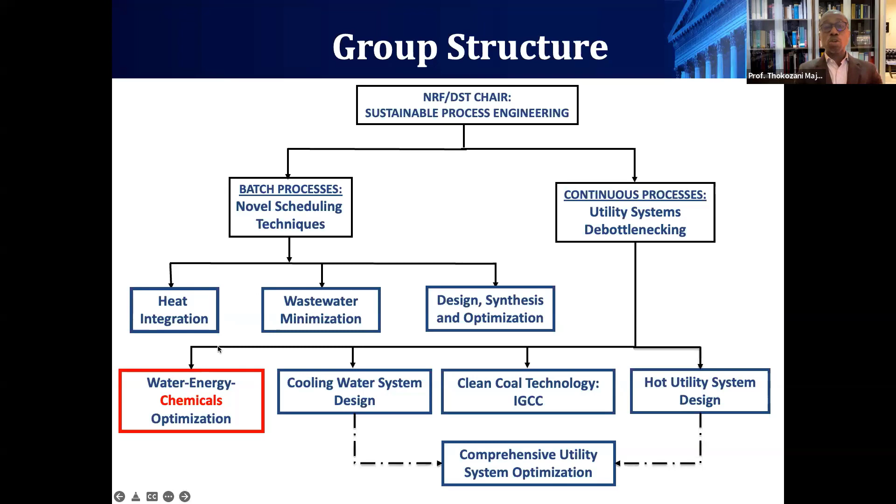As far as this presentation is concerned, I'm going to talk briefly about the social perspectives as far as water and energy are concerned, talk about water conservation methods, and then talk briefly about the nexus in its broadest sense. And then, as I did mention, there will be real-life case studies.

The social perspectives here, by the way, is something we always have to keep in mind. We cannot talk about saving water and energy without looking at the social dimension. In fact, that is the reason why we are looking at water and energy - it is the social perspective.

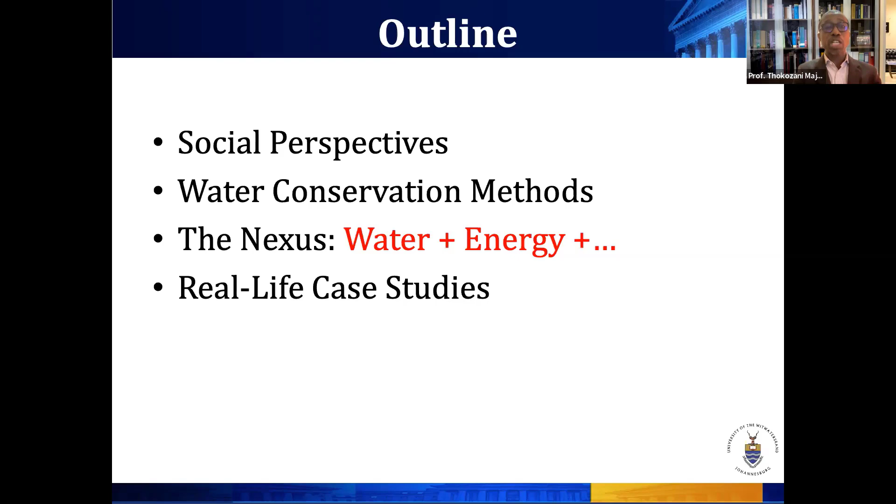Someone actually mentioned, this was in 2016 in the Los Angeles Times, that of the fears that have risen alongside a warming planet, perhaps there is nothing closer to our attention now than the possible water wars. The issue of water wars, although people look at it from a distance, we are starting to see it even within the South African context. People are starting to really realize how serious that issue is. But there are some documented cases of water wars, just to demonstrate why we are so obsessed with saving water.

If you think about India - this is closer to you, colleagues in India - you know very well the Cauvery River. There are two communities there, the Tamil Nadu and the Karnataka. These are agricultural communities, and they've always been fighting along this river. One is upstream and one is downstream - Karnataka is upstream and Tamil Nadu is downstream.

And they fight all the time as far as water is concerned. In our neighborhood here in the southern part of Africa, but not in South Africa per se, we've got an issue of Botswana and Namibia as well. The more Namibia develops, the less water gets into Botswana, because they use the same river stream from the Okavango River.

Then there's another case, which is also well documented, from Thailand. After the construction of the Pak Mun Dam, there were people that suffered downstream because of that - most of the water was captured by the dam. And then there's an issue of the Incomati River - this is now between us here in South Africa and Mozambique. There's always been an issue with the water in that Incomati River basin.

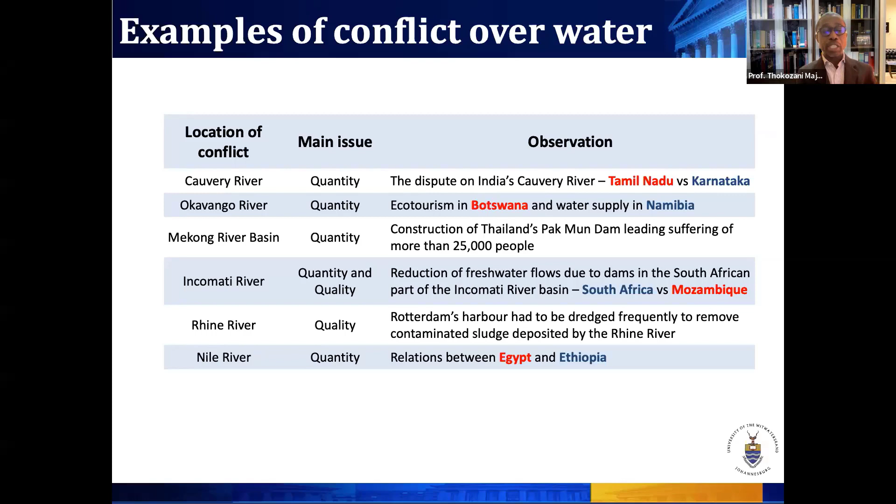South Africa ranks very high among the countries that are water scarce. Actually, we are regarded as a water scarce country. We rank in the top 30 list of countries considered driest in the world. As you know, there are about 195 countries in the world, so being in the top 30 means we really are very, very high. So that is where we are.

There are two reasons why a country could be water scarce: economic scarcity and physical scarcity. Economic scarcity is simply saying there is water there, but you have not invested enough to capture that water for adequate use. It's not that there's no water in that country. South Africa doesn't rank in that category.

South Africa is a physically scarce country, meaning that the location of the country is such that the rainfall is very, very low. We get less than 50% of the average rainfall globally as a country. So definitely we are a water scarce country, and we have to start thinking very seriously about how we use our water sparingly or efficiently.

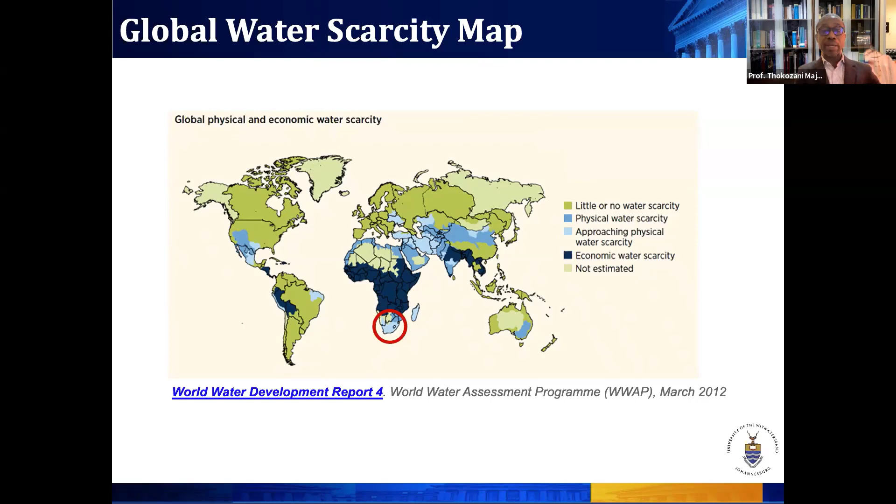I've got mining industry and power generation. If you group all of those together, they consume about 8% of water in South Africa. But what is hidden in that equation is that by the time that water leaves those industries, it is highly contaminated. So they use 8%, but they contaminate more than 60% of our water streams.

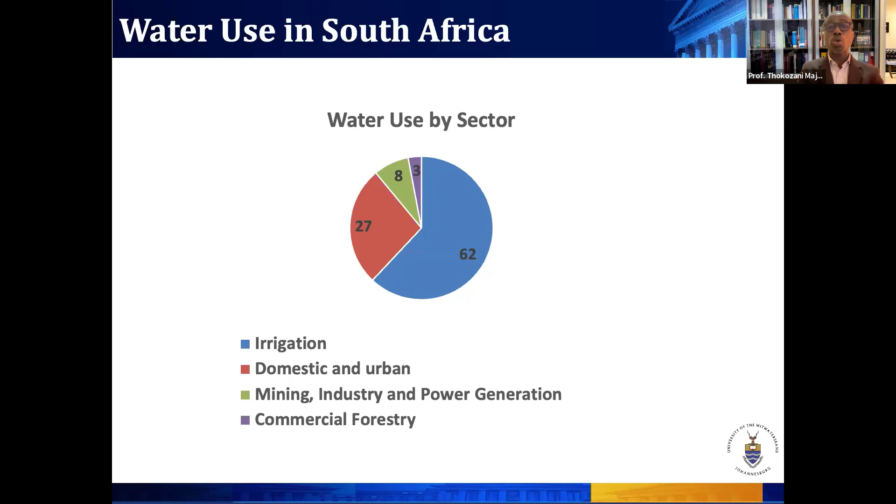I just have an example I want to share with you quickly. I think this video is going to play here, it's a real life case study. As I'm sitting here, I decided to work from home this morning because of load shedding, so that I have connectivity. But a stone's throw away from where I am, there's a river known as Henops River, which was very clean when I came here 15 years ago. It is now looking like what I'm going to show you, because of industries, and at the heart of those industries is the textile industry next to our airport. I'm going to show you that video now, I hope it plays quickly, it's not a very long video.

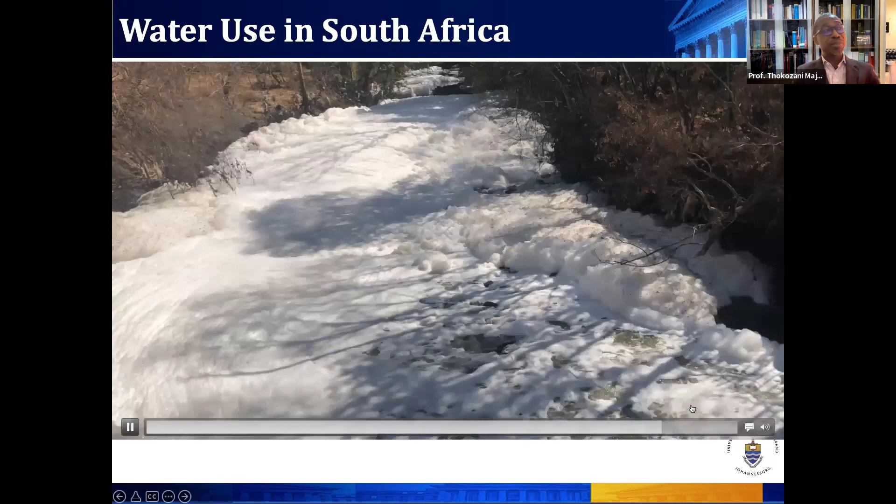I hope you can all see this. This is the river that was very, very clean not long ago. This is how it looks like now. That is foam that you see on top of this river. There is no life that can survive there. You can imagine what the COD, BOD there is at the moment. You can't find any fish there. There's stench all over that river. And that is all because of industries. It's one of our very biggest rivers, one of the biggest rivers in the Centurion area. So I felt I could just share that with you.

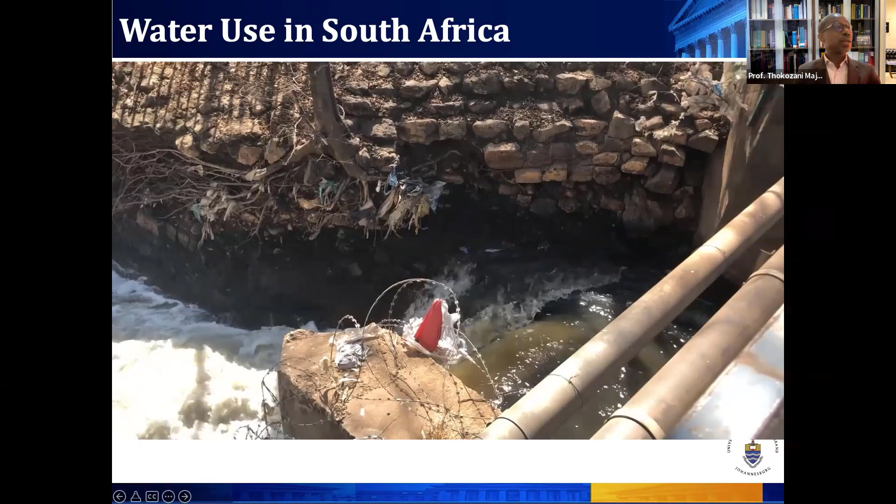Let me go to how do I get to the next slide now? I felt that I could just share that with you, just to show how bad things are at the moment.

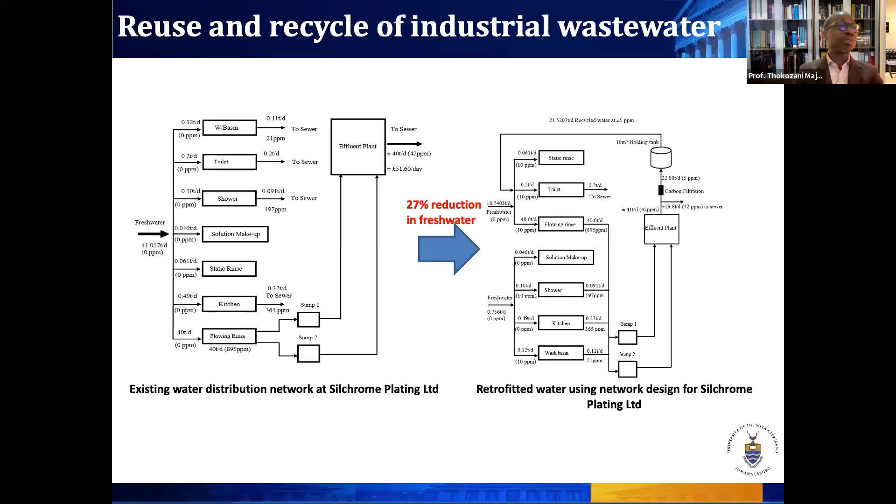But if you really want to see some serious or significant reduction in water use, it is when you start involving regeneration. So when you start talking about regeneration-recycle or regeneration-reuse, it is there that you see a steep change in terms of water reduction. But that also comes at a price. And why am I saying this?

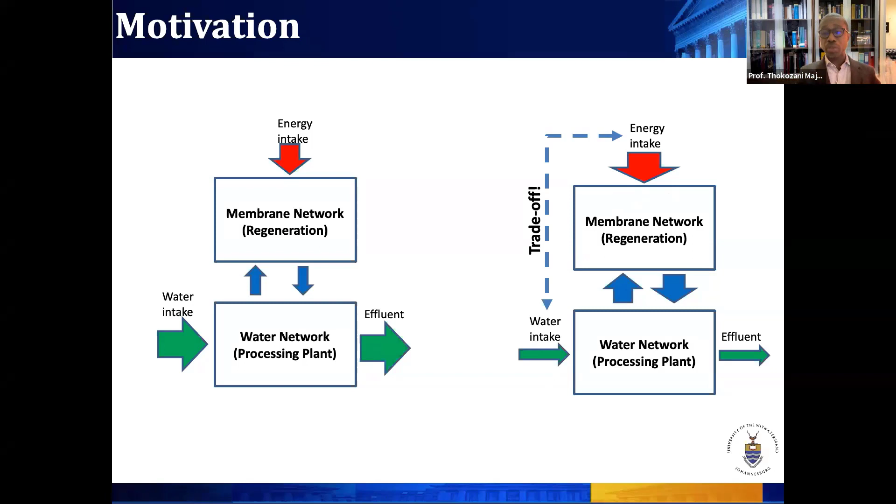But of course, we can expand this and look beyond the process. I've got an example here that I'm going to talk about where we go beyond the process as we look into the water energy nexus.

Now, the work that we do in our group is really about optimization, in the main - process optimization. So basically, in very simple terms, we are looking for that sweet spot, if you can call it that, where your overall cost is minimized because you've minimized your energy cost and you've minimized your water cost. We are looking for that point. That is basically the essence of the work we do in terms of optimization.

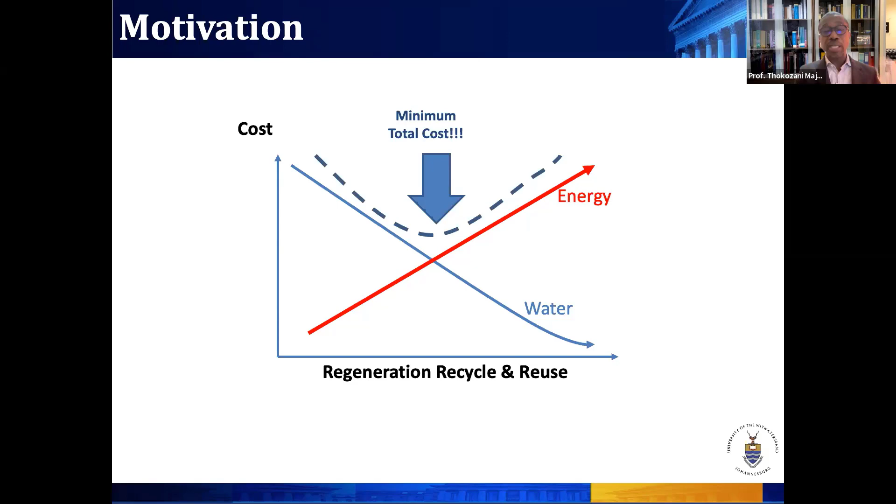You consider everything that is involved in the process, particularly within the energy water space. And this you cannot do, by the way, using rudimentary methods. You would need to have a systematic algorithm that allows you to reach that. It's not simulation, it is definitely optimization.

We've talked about, since yesterday, the water-energy-food nexus. But I've said in the recent past that maybe we are missing another dimension here, which is chemicals. Because you cannot achieve all of these things without chemicals. Chemicals play a very huge role in the food sector. I don't know how much food crops we can grow without chemicals.

To produce chemicals, we all know—I think it was Raj's presentation yesterday—the amount of energy that is used in the production of chemicals. Even Vanita spoke about that at some point. So the fact that chemicals are very central to our livelihoods means that we will always use energy and water in big numbers.

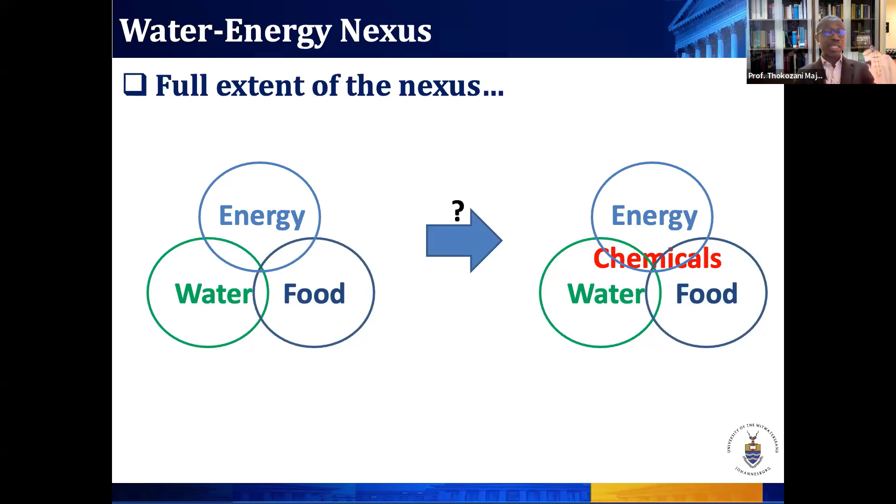That's why I'm saying maybe somewhere there—it's still very hypothetical at this stage. In fact, I haven't seen a paper that talks about this, where it's energy, water, food, or energy, water, chemicals together. I always leave out food because that's not really the space we find ourselves in most instances. But really the full nexus should involve everything that you see there. That's how it's supposed to be in real life.

That is the reason why, when we say we want to save energy, the first port of call should be industry. If we say we want to save water, still the first port of call should be industry, because they are the ones who contaminate the most. When we say we want to save energy, it should still be industry, because they are the ones who consume the most. So we are really at the right place as chemical engineers in terms of saving water and energy.

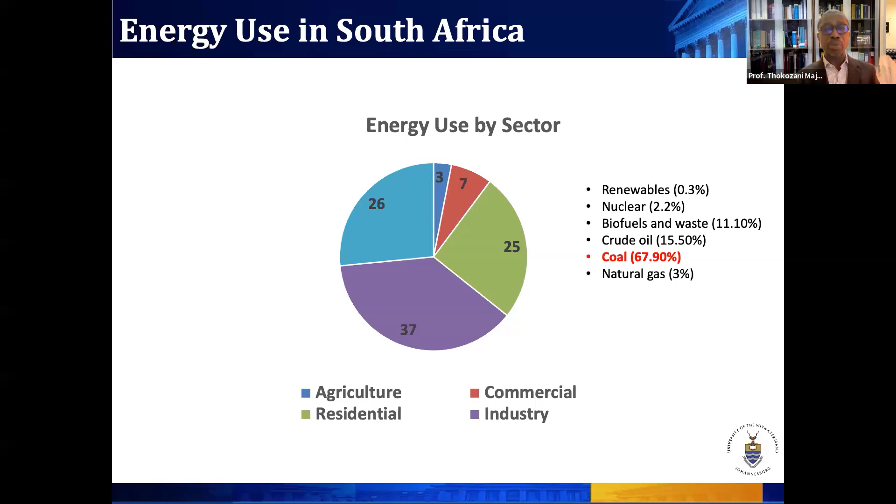But we have a lot of coal deposits in the country, which makes it very difficult for people to let go of coal. They also talk about clean coal technology, and to be frank with you, I don't think there is such a thing as clean coal technology as far as carbon dioxide is concerned. If you want to burn coal, you will produce carbon dioxide regardless of how clean it is.

So this brings me now to really the heart of my presentation, which is the case studies. If I can just share with you some of the case studies based on some of the work we've done here in South Africa. South Africa is a highly industrialized country—in fact, the most industrialized in Africa. So we've got a number of industries here, multinational companies from all sectors.

The example I have there is from the Pulp and Paper company, SAPPI—the South African Pulp and Paper Industry. It's a multinational, I think you would know SAPPI as well. It's one of the biggest pulp and paper manufacturers in the world, and it's a South African company. We were asked—they've got a facility not far from here. In fact, if you saw the floods on television not long ago, this is actually where this plant is.

It's just next to the ocean, a place known as Umkomas. It's called Sappi Saiccor at Umkomas. We did some work for them there. They wanted to reduce water in their bleaching facility.

When you make paper, you have to have bleaching at some point. That's why you have your white pages in particular. Your cardboard box is a bit dark because it's not bleached that much, but your paper that you write on is white because it's bleached using chlorides in particular. So it's a very, very important part of the plant, the bleaching plant, and it uses a lot of water.

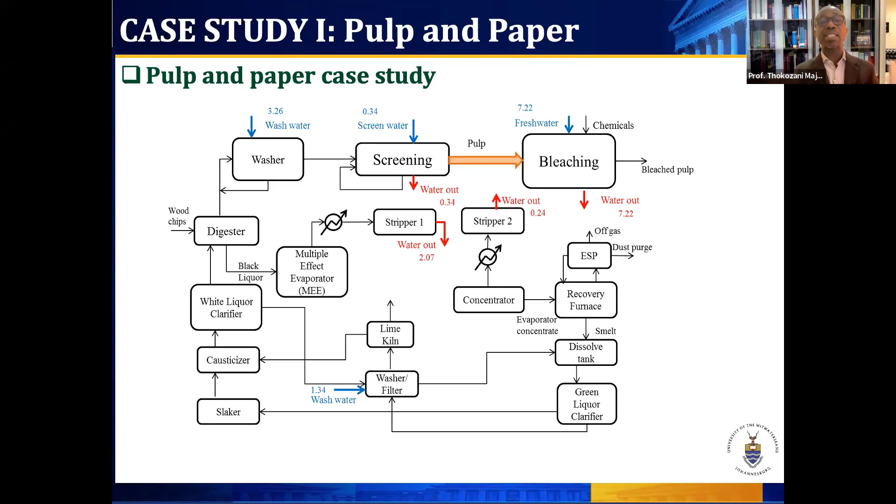It looks very simple when it gets to this stage, by the way. There's a lot you can do beyond this point. But to get here takes a very, very long time and a lot of buy-in from the engineers within the plant. Because all this information that I'm showing to you now, which is your flow rates and your composition, that is what you are given by the engineers who work in the plant, who understand how much and what composition it is.

How much goes where and what the composition is. So you have to work with the people in the plant, and then you'll discretize your plant into the sources as well as your sinks. When it gets to this point, then it is here that you use your mathematics. I tried very hard for this presentation not to show too many equations. In fact, I tried to avoid equations for this presentation, just to show you the concepts rather than the equations.

So we build a mathematical model from here that will definitely take advantage of the recyclability and reusability of water. And in those models, we can also embed regenerators. We've done that in the past. I can share with you some of the papers that we've written in that regard, where we've looked at ultrafiltration as one of the regenerators.

We've looked at reverse osmosis. We looked at electrodialysis, by the way, which is something that is not as common as reverse osmosis in South Africa, but it's a very powerful regenerator. We've also used membrane distillation, so we're doing some work there on membrane distillation as well. These are all the types of membranes that you would use as regeneration.

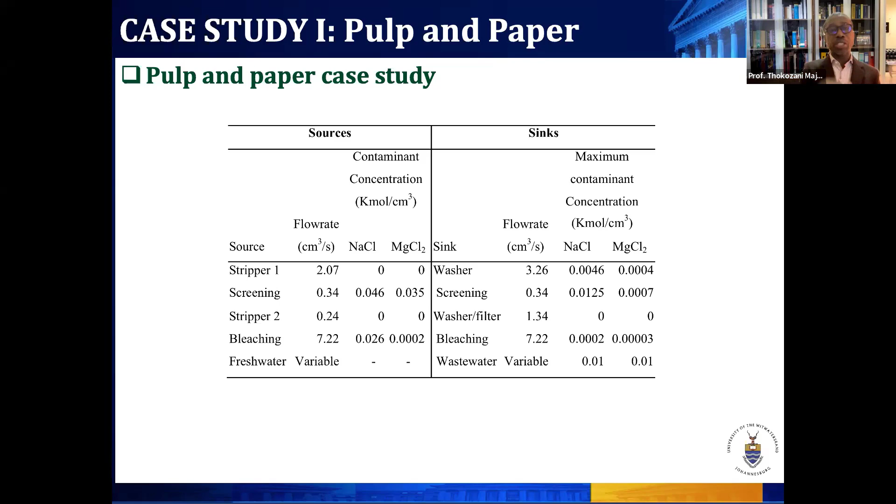So once you have this information, then really you put it into the model, and then you can come up with the plant. This is one of the results that we came up with.

And this is the good thing about using mathematical optimization. You can always play around with different variables and different options, and provide different avenues for companies to decide which one is cheaper, which one is doable at any given point in time.

What I'm giving you there was the best solution that would require the use of an electrodialysis regenerator. Now, this is very, very expensive - to put a regenerator in the plant is very expensive, not just in terms of energy, but in terms of the capital cost that you have to invest. So you always have to factor that in - there's an issue of operational cost because of energy, but there's also an issue of capital cost investment.

But the payback tends to be very, very short. Usually you have a payback period of less than 2 years in most of these projects, which is not a very bad payback. In most industries, they tend to be worried when you go beyond 3 years of payback period. So this is a doable project - about 36% reduction in fresh water, and about 60% reduction in wastewater because of a regenerator.

One thing that I don't mention here, and we don't mention in most of the work that we do, is that it is not just the wastewater we account for. We say 60% reduction in wastewater, but there's also brine that comes with the regeneration. We seldom ever talk about that. So it's not really effectively 60% reduction - I would say maybe effectively you are sitting at about 40% reduction in wastewater if you count the brine that would come from the electrodialysis unit.

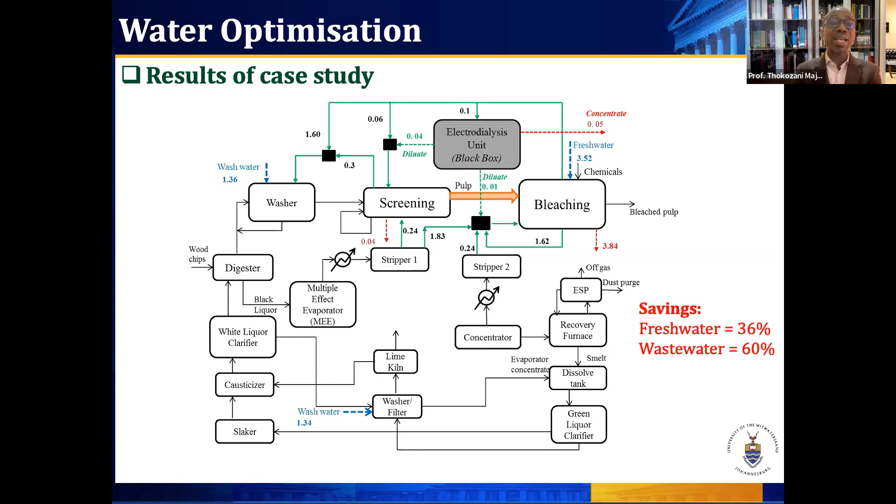So we've worked with the pulp and paper industries. They use a lot of water, and we are still continuing maybe to explore avenues of working further, because this was just one unit. And one of the things that came out of that project was that you could actually have a zero effluent facility - one facility that can have zero effluent, because some of that water had a sink in the operation. They could actually afford to do that.

There's another example here. We have Johnson & Johnson, which is not far from where I am - it's in East London. East London is one of the cities in one of the provinces, Eastern Cape here in South Africa. It's also a highly industrialized province - the biggest Mercedes assembly facility is down in East London, Mercedes-Benz. But they also have Johnson & Johnson there.

Johnson & Johnson, as you know, is a pharmaceutical facility. They make shampoos in that facility, they make deodorants, they make soaps, they make lotions. We worked in that facility about, what now, maybe 6-7 years ago. The idea again was to reduce water.

I've just given you the layout of how the facility looks like. They receive water from the municipal supply, and most of it will be used for cleaning - they'll clean the mixers and the holding tanks. They'll also use it somewhere in heating and cooling. Some of it is deionized because, of course, you're dealing with a pharmaceutical facility, so your water must be of the cleanest possible standards. They'll deionize that water, but there's also water they would use for general domestic purposes like drinking and ablution facilities.

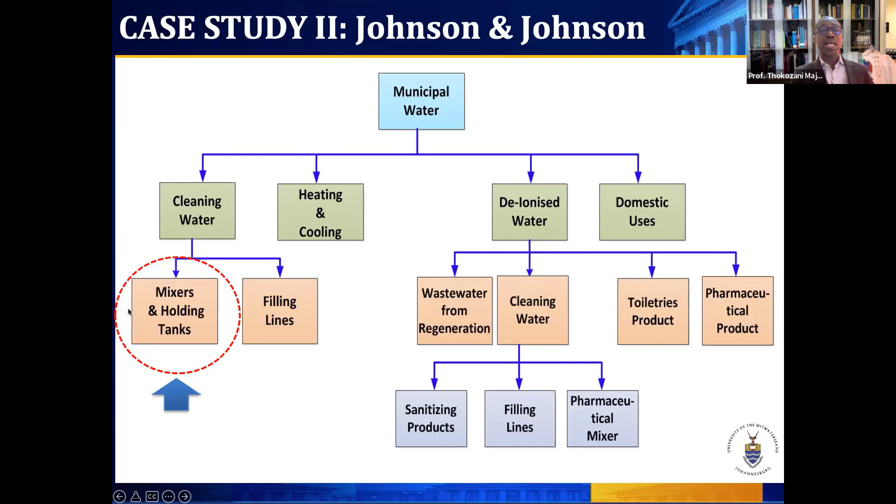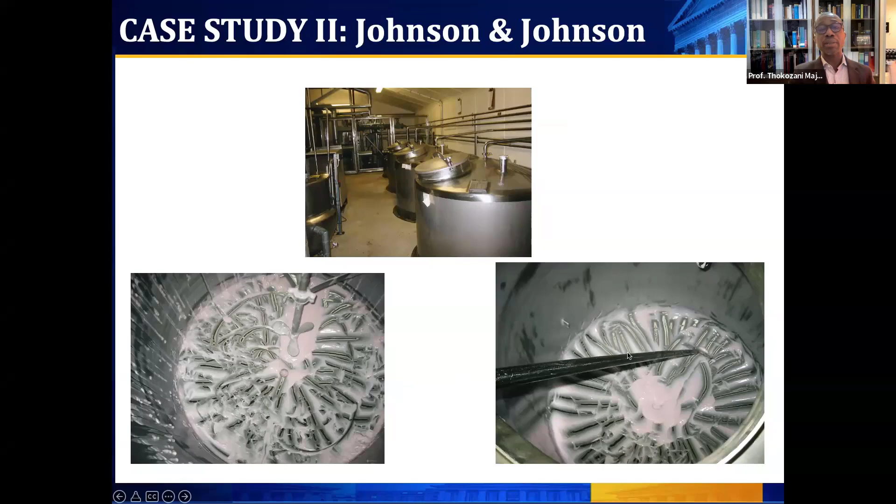Now what they do is they spray these tanks with water, clean water from the municipality, and that all goes into the drain. This is still a product that goes into the drains. When we visited that facility, on my first day, I realized there was a good opportunity for saving water. They just spray this and all of it goes into the drain. So we had to see what were the avenues for reducing that water.

Some of the results. Again, before you even go there, you need to get a lot of information from the people who work in the plant. You also, as a scientist, have to spend time in the plant. I have a nice photo that I took there, but I don't have it with me here. I spent a lot of time in that plant as well.

So they make shampoos, deodorants and lotions, and we know from the plant that after they've produced the shampoos, there's a residue left in the tank. This is the degree of contamination you have. It's important to know this to determine recyclability, because you don't want to tamper with product integrity. If we reuse water that is contaminated, it must not contaminate the next product in the batch. This is a batch facility, and that's another dimension that makes it very complicated.

Each of those tanks will produce different materials at different times, deodorants at some point, creams at another. So you have to make sure the cleaning is really done properly so there's no opportunity for cross-contamination, which would affect product integrity. Quality there is of essence.

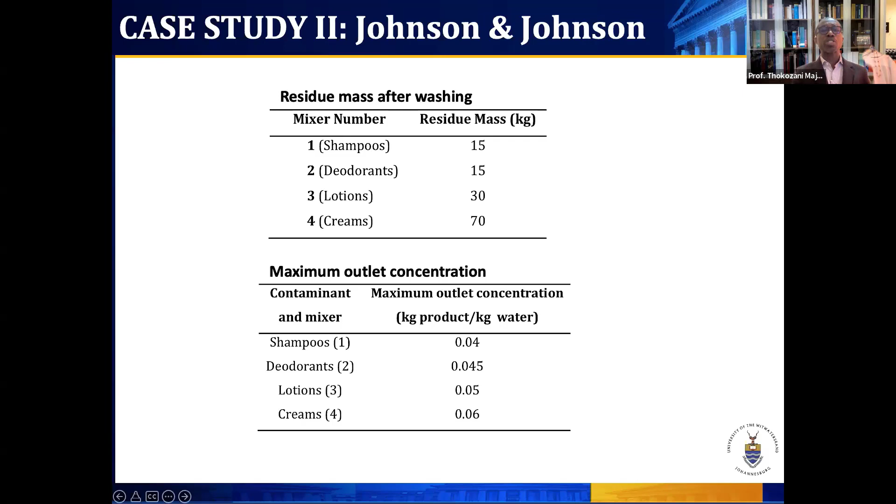So all this information would come from the plant. They'll also tell you the maximum outlet concentration of water they produce. After they've sprayed, that water has to be dispensed into the nearby river stream, so there's a limit on how much concentration is allowed. All this information is given to us.

And then, of course, the amount of water they use when they clean. CIP is a very common term used in almost all batch facilities—it stands for cleaning in place. Even in the textile industries, they've got CIPs. So they would clean, and this is the amount of water used in cleaning each batch, to remove whatever residual product is there.

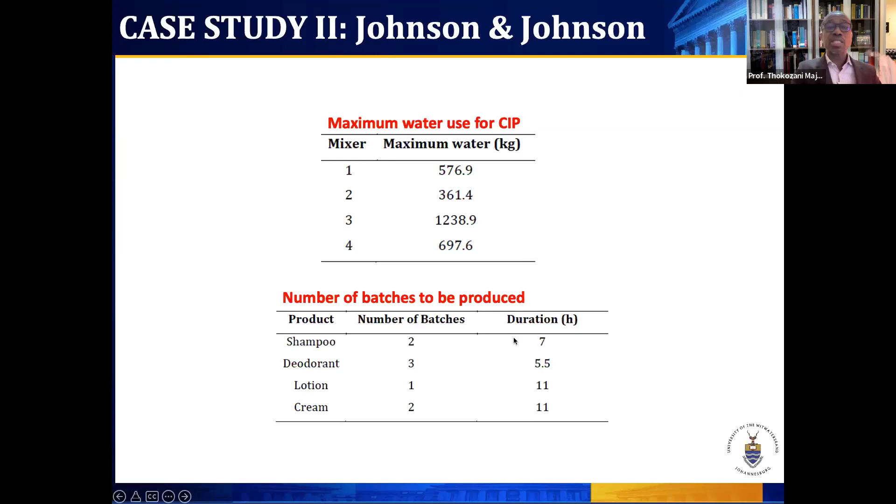They would also give us the number of batches they'd have to produce in a given period, and how long it takes within the tank to produce this. This is the issue—when dealing with batch plants, you cannot avoid looking at time. So this is the time dimension they gave us as well.

But with the background I've just given you, you leave some product in the tank, and you spray the tank to clean it for the next batch. That water you spray leaves with the product. We realized that by recycling that water back into the facility, some of the product could actually be recovered, because most of these lotions are aqueous based. So in any event, in that tank you'll be putting water. If you recover some of the streams back into the tank and top it up with water before doing the ultimate formulation, you recover quite a number of products very easily.

So there was a 30% product recovery, associated with almost 3 million rand per annum saved in that project. They still do that, by the way—I'm still in communication with them. This is equivalent to about $200,000. And as I say, this was some time ago, maybe more than 6 years ago when we did this.

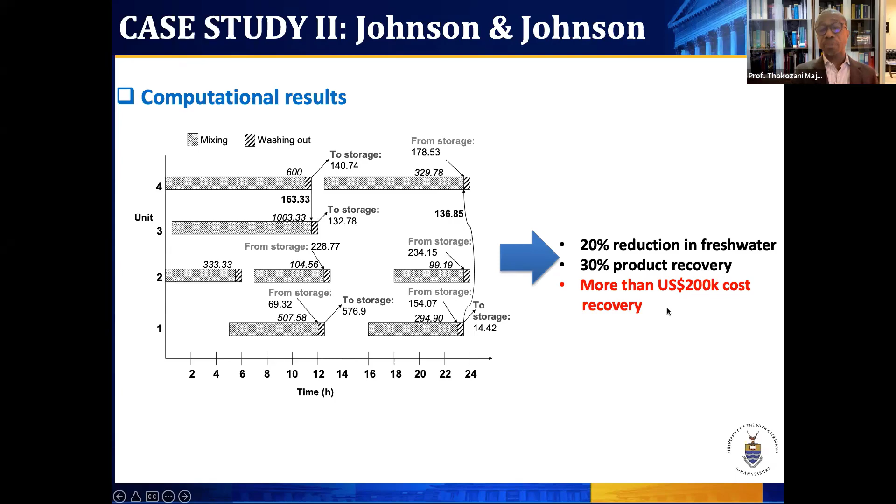It would be now of greater value than that 3.7 odd million rands per annum that they were saving. So that's another example. And then lastly, I just want to share with you quickly one example.

This is another example based on ESKOM, our largest power generation facility. They've got about 15 huge power generation facilities in the country, old style facilities based on pulverized coal power generation. It's just a boiler: you put in coal, boil the water, steam it up, superheat the steam, run your turbine, and ultimately you have your electricity. There are 15 of them in the country.

We were asked to look at one in particular, which is in Kriel. Kriel is in Mpumalanga, another province here in South Africa. This is a 3.6 gigawatt facility. South Africa as a country is a 43 gigawatt facility, so this gives you a sense of how big this facility is - that's almost 10% of the national capacity required. So it is a huge facility.

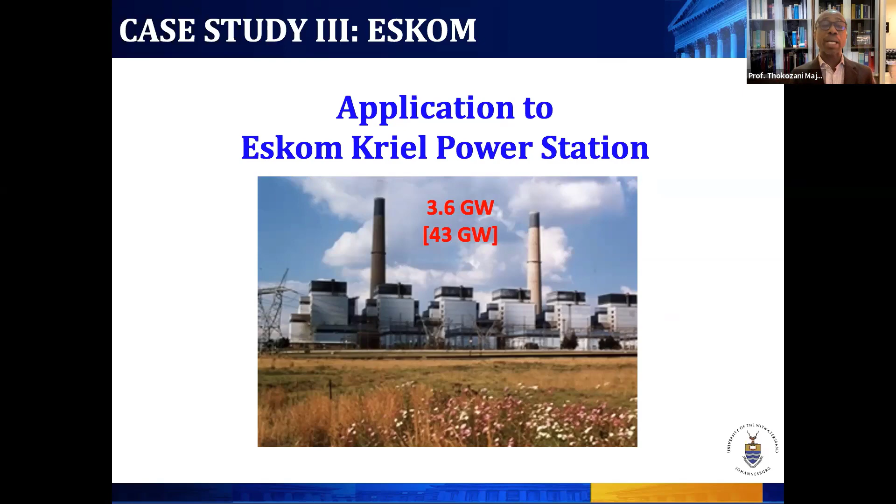They use a lot of water in that facility. So this is the facility - you've got cooling towers over there, this is the cooling towers, and those are your stacks. This is the stack where you produce your gas after burning your coal. This is your flue gas.

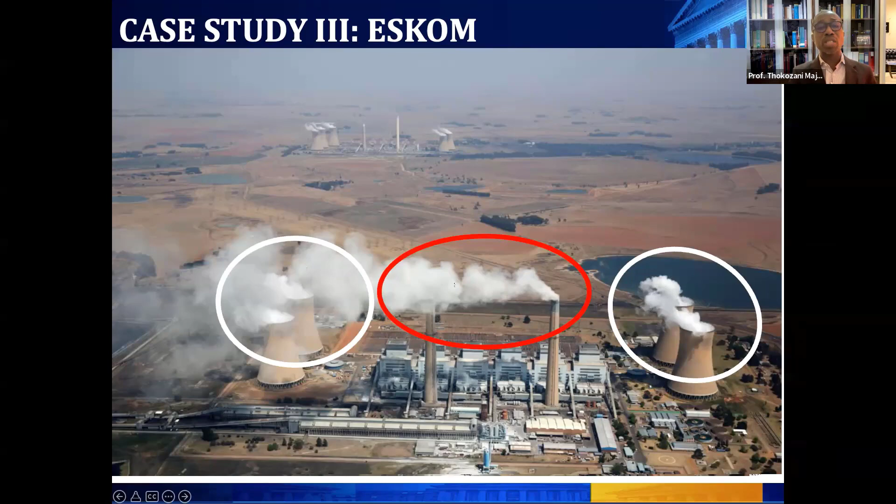I always say to people, the red part - this is deliberate, by the way, I've got red there and I've got white there - the red part is what will kill you. The white part won't kill you, it will take a very long time to kill you. It will kill you also because there are no ions in that water you see coming out. If you drink that water, you'll be deionized after some time, but it's not as bad as what you see over here. So this is how the facility looks like at Kriel.

We're asked there to come in and save water, but where does the water come in power generation? Quickly, what you see there is the generation facility. There is your stack that I just showed you with flue gas. There is your cooling tower with your evaporation there, which is the water really - this is water evaporating.

But because of that loss of water through evaporation, we have to make up all the time. So we use fresh water here. This water comes from municipality at times, or can come from the rivers in most instances to make up for whatever loss you have there. You need that water all the time so that you cool the exhaust from the turbine. So your coal goes into the boiler, you need air of course to burn that coal, and then the flue gas goes out.

After burning the coal, this is your water, this is a closed system that you see there. Your water will boil as it goes through the boiler, it will be superheated as well - it must be superheated - and then it goes to the turbine to generate your electricity. The exhaust from that turbine has to be cooled at all times so as to improve the efficiency of the plant. If you don't do that, the efficiencies tend to drop very low.

And here I'm not talking about very large efficiencies, by the way. The highest efficiency for a plant like this is 35% - you cannot go beyond 35% in terms of efficiency. But be that as it may, if you remove this cold water here, that problem will be even more - in fact you'll be operating easily at maybe 20%, which is not a good thing to do. So you need this water.

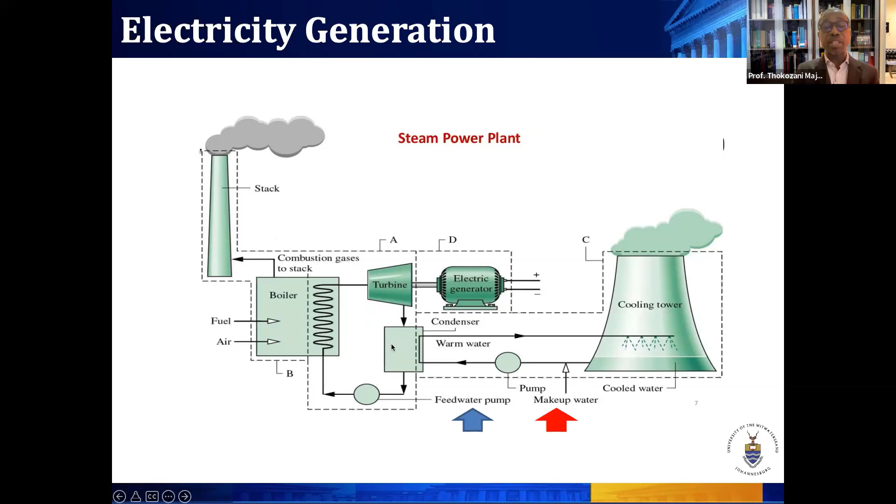I just want to draw your attention to the sources of water in this plant, and I'll tell you how the plant looks. You've got the Usutu River, one of the largest rivers in the country, which feeds the cooling towers.

In this facility, you've got the northern section of the cooling towers, which is a major water sink, and the southern section, another major water sink. The southern part is fed by the Vaal River, and the northern part is fed by the Usutu River.

This facility uses in excess of about 100 megaliters of water a day. It's one facility, and there are about 15 of them in the country, so we can do the math on how much water we use generating power. We are a water scarce country, so if you want to produce more power in South Africa, we don't have this extra water. That is the reality we have.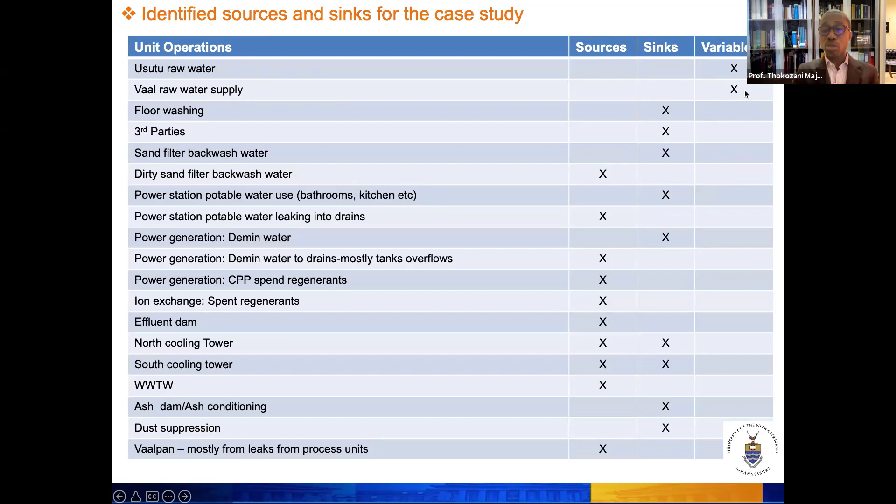We had to get this information working with the engineers in the plant. They gave us the flow rates and the concentrations. Here we worked with TDS, total dissolved solids, as a collective measure of contamination, throughout. So we have all the information, all the units that generate water, and all the units that use water.

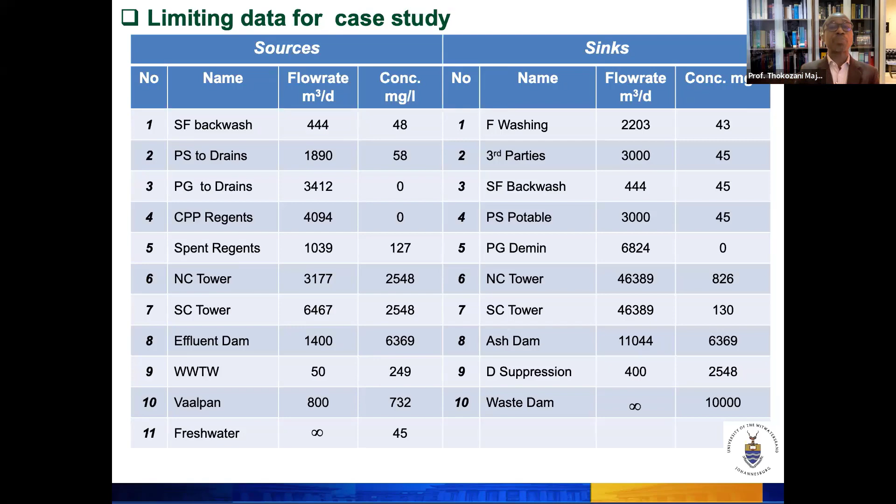Ultimately we came up with this solution, and this was very interesting. It resulted in about a 10 to 20 percent reduction in water use.

Toko, sorry to interrupt—in the interest of time, can you wind up in 2 to 3 minutes? Yeah, okay, I will do that now. I was doing it yesterday, now it's happening to me.

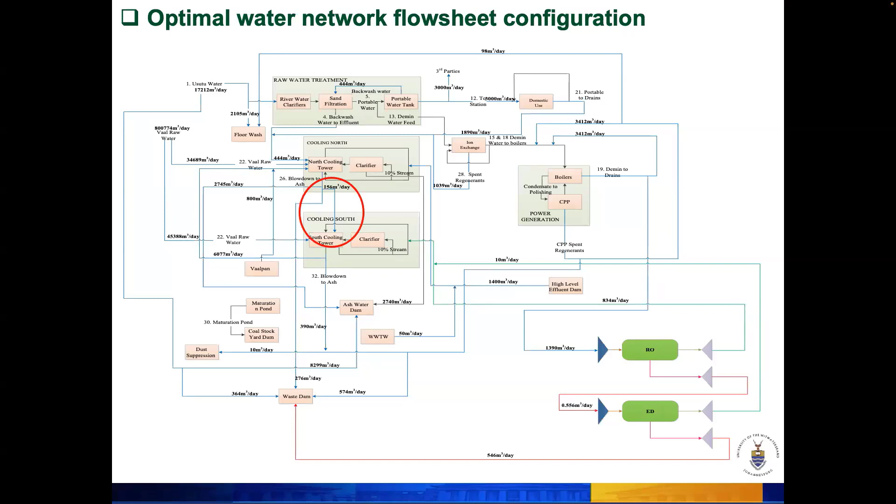Now you can see where we saved water. In fact, it was taking blow down from the northern side into the southern side, because the cycles of concentration on the northern side were much lower than on the southern side, so there was an element of recyclability there.

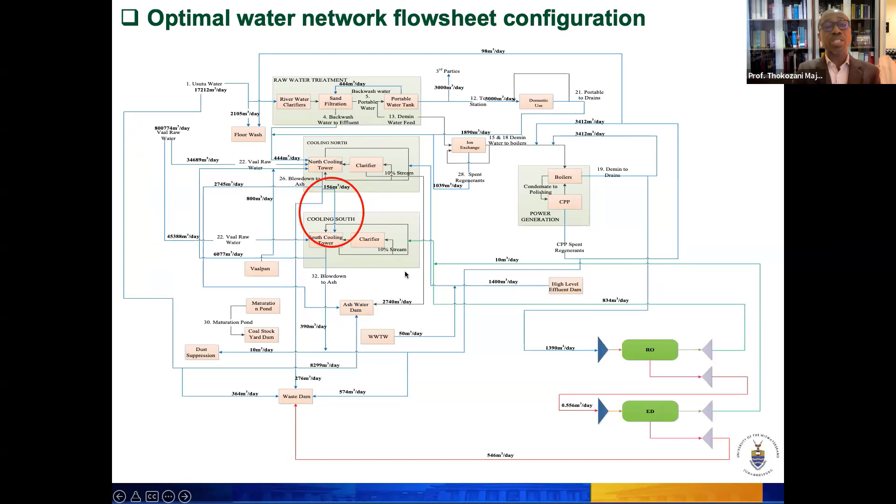In short, they were using about 120 megaliters of water, and with the solution I've just shown you, that came down to about 97 megaliters. There is a measure used in these units called liters per USO—liters of water used per unit sent out, which is the gigawatt hour. They were sitting at 3.1, and now they're down to 1.9.

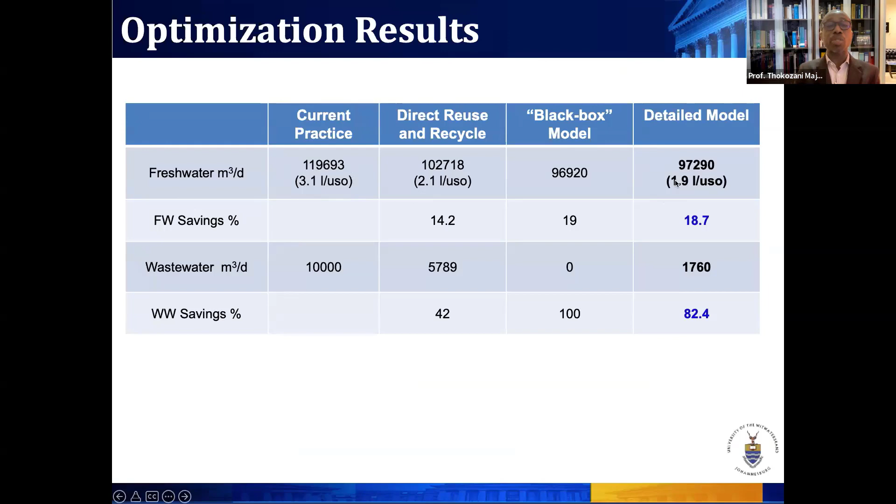This solution, by the way, was applied—I'm just giving you some examples of where we've applied this in real terms.

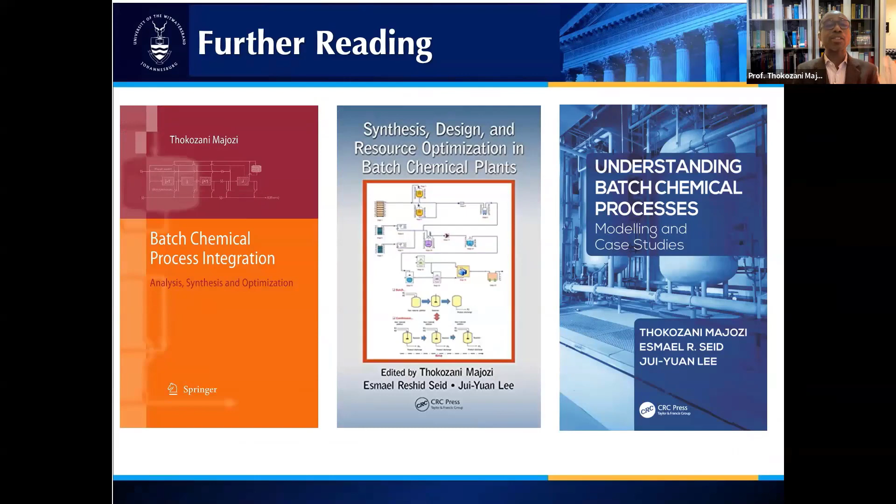We also have other books on batch processes, covering work on pharmaceuticals, agrochemicals, and the like—those are some of the books we produce in the group. I'll also acknowledge the funders: NRF, Water Research Commission, and the British Council, which funded us for that particular workshop, and SASOL as well.

Thank you very much for indulging me. I'm very sorry for taking so much time, but that's what happens in this space.